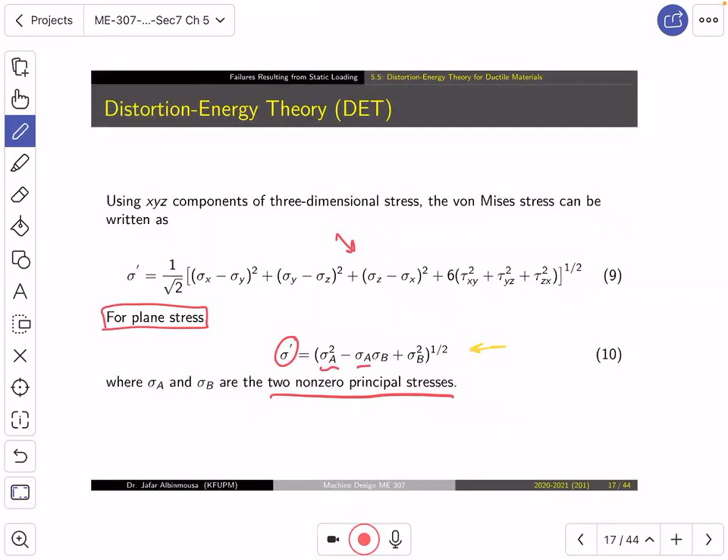Yes, we can. Okay, so we said about the distortion energy theory is that we call it the von Mises equivalent stress as well. And for a plane stress, for example, it is sigma prime. For a plane stress, this is the form of sigma prime. You can also solve it using principal stresses for plane stress, or for general state of stress, which is this one. Now, again, similar to the maximum shear stress theory, we are going to introduce a factor of safety, N.

And N equals the yield stress of the material divided by the von Mises stress. Okay, so imagine this. Always imagine that the yield stress on top should be the maximum value. The one below it should be less than that in order to get a factor of safety greater than 1. Sy doesn't change because it's a property of the material, unless you change the material. So you will see the state of stress and put it below. If that state of stress is so big, it will divide Sy by a big number, and that's when n goes to a value which is less than 1, which becomes not safe.

Okay. Now, the distortion energy theory, if you try to predict the shear yield stress using it, it will become 0.577 the yield in tension. If you remember, the maximum shear stress theory tells you, go and find Sy from tension and then divide it by 2, and that's how you can find the yield in shear. So this one is 0.5 multiplied by Sy. Is that correct? This is Sys from the maximum shear stress theory.

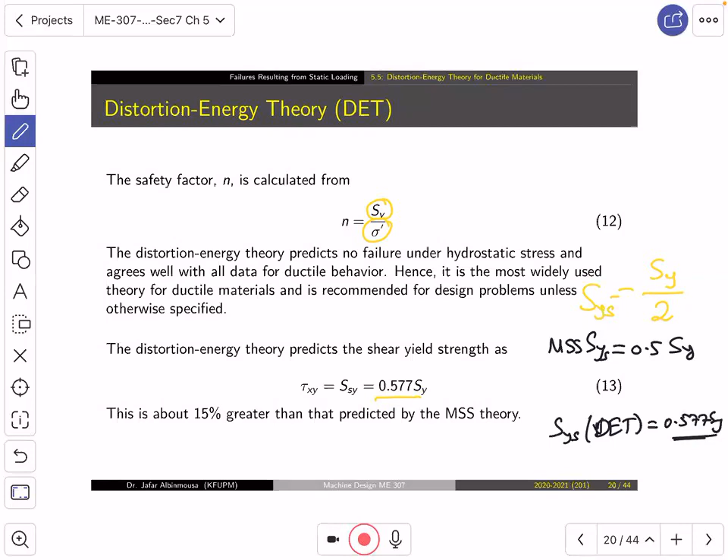Now, Sys from von Mises theory, or the distortion energy theorem, is equal to 0.577 Sy. So it's a little bit off, by 0.077. That's 15% greater. Okay. So I know you may now think, okay, how can we use these theories? We're gonna have a comprehensive example in a minute. So let me show you the next theory.

Next theory is the Coulomb-Mohr theory. This theory was introduced because there are materials which behave in an asymmetric fashion. What does that mean? It means that their yield in tension is different than their yield in compression.

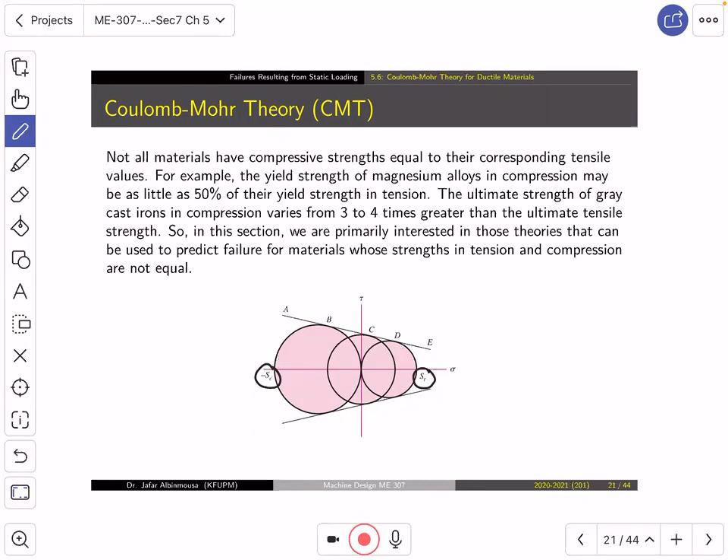You got my point? And what happened? Well, some materials are stronger in compression, some materials are weaker in compression, and vice versa. We don't know. So what happened is this. The Coulomb-Mohr theory, or sometimes called the internal friction theory, states the following. It says go and find the principal stresses. So you need to find them.

You can't use sigma x, sigma y. Only distortion energy theory allows you to do that. And then if the first principal is in tension, of course, here, ya shabab, we're gonna have the 3 cases: when all of the Mohr circle is in tension, all of the Mohr circle in compression, or the Mohr circle is in between. But the theory in general says that if sigma 1 is the positive principal stress, then you should divide it by St, which is the yield in tension.

Why are we calling it St, not Sy? Because you can actually use this not only for yielding, also for ultimate. Which means if you, for any reason, want to use the ultimate strength instead of the yield strength, you can do that. And another thing is that when we use St, we tell you they are in this condition when the yield in tension is different than the yield in compression. Okay, and then you divide the third principal by the compressive yield or the compressive ultimate. So you take sigma 1 over St minus sigma 3 over Sc, which equals 1.

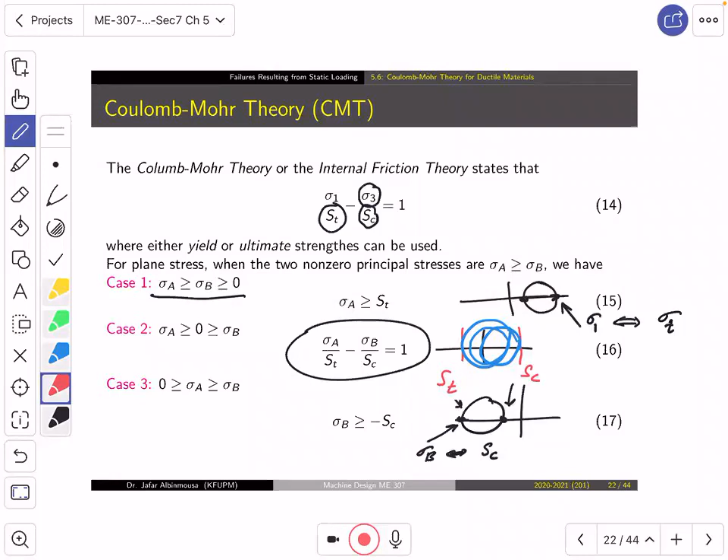Okay? So, interestingly, ya shabab, if you plot this equation, assuming that the material has bigger compression strength in magnitude than tension, then what happened? You will write St here. This is, for example, 100 and 100, and the yield in compression, let's say it is minus 400 and minus 400. Again, like the maximum shear stress theory, we will have two constant lines bounding the boundary, and then we will have two linear lines in between.

Of course, there is no doubt, some materials might have, for example, 300 and 300, and maybe minus 100 and minus 100. That's possible. Okay, so you will have a little square over here and a big one there, and then in between you draw the line.

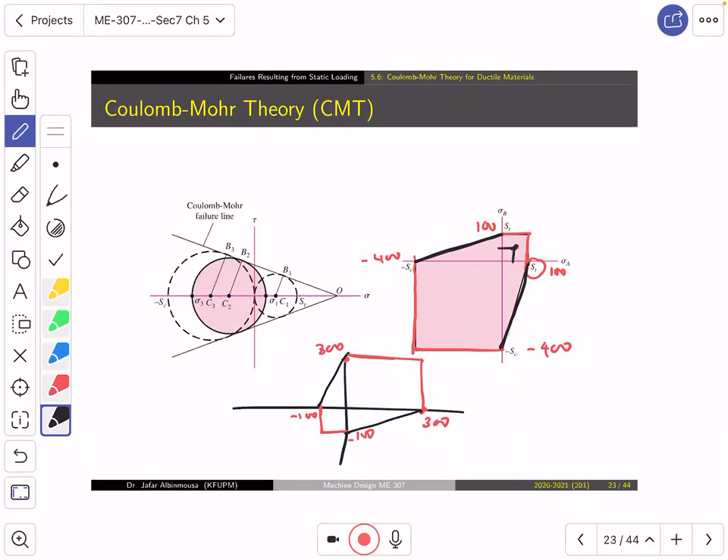Again, if you find sigma 1 and sigma 2 and then sigma 3, and then you determine which is sigma A and which is sigma B, you will go and see, are you within the envelope? Or, for any reason, if this is out like this, you are outside. Then if you are outside, you are not safe. This is a graphical way to tell whether you are safe or not.

You understand, ya akhwan? Now, if we want to write this theory as a design function, which is the most important equation, it's going to be sigma 1 over ST minus sigma 3 over SC equals 1 over N, where N is the factor of safety. If you want to find the shear yield for this material, which behaves differently in tension than in compression, it is the yield in tension multiplied by the yield in compression divided by their sum. That's the prediction of the yield stress for the Coulomb-Mohr theory.

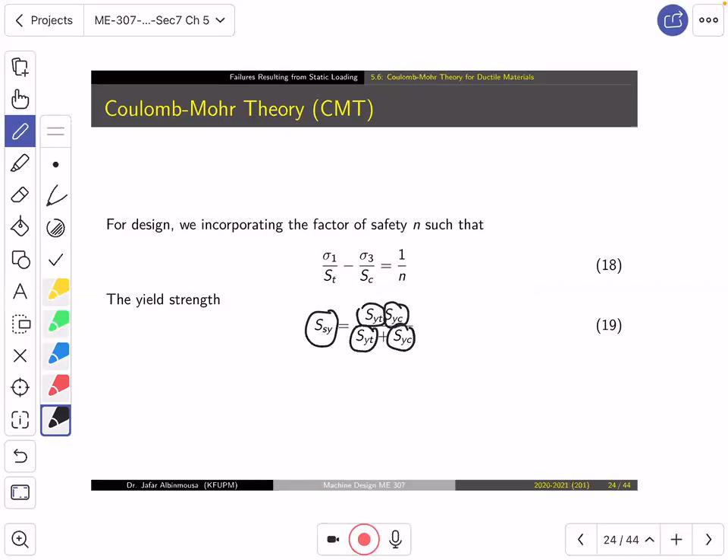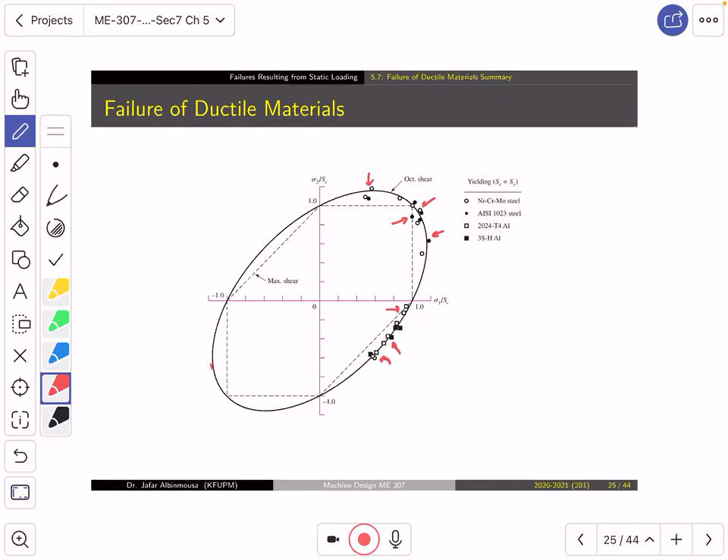Now, I remember I showed you this before. This is a comparison of the von Mises theory and the maximum shear stress theory, and those little dots around are experimental values. Sometimes you can see that some values are close to the maximum shear stress theory, and of course there are also many values that seem to approach the von Mises theory.

Now, let's go over this in like 3 minutes, okay? And then we'll have the next 2 minutes just to get ready, because in 5 minutes the quiz will start.

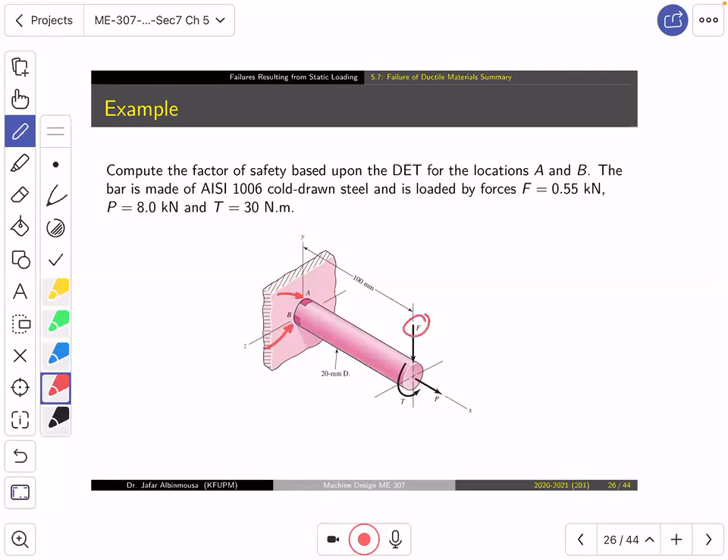So what do we want? We want to compute the factor of safety based on the distortion energy theory for location A and B. As you see, this is A and this is B. The bar is made of AISI 1006 cold drawn steel, and it is loaded with a force 0.55 kilonewton. Then we have a P force, which is 8 kilonewton, and a torque which is 30 Newton meter.

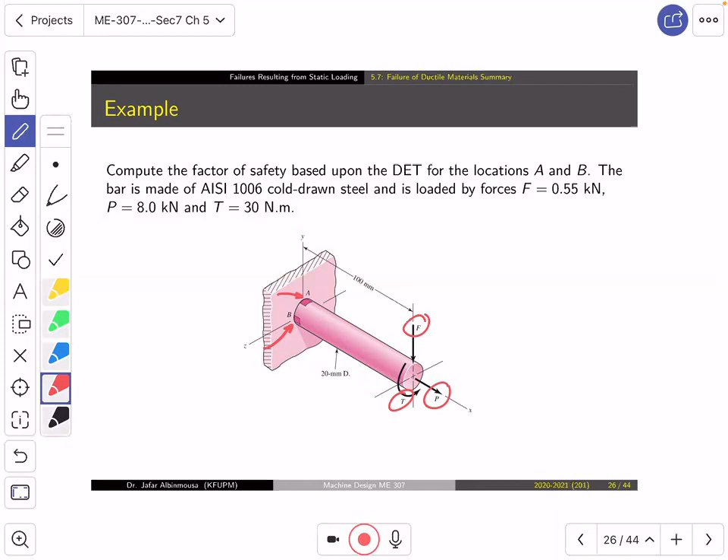Now, what I want you to understand is the question, what does it say? It says you want to find the factor of safety for point A and B. If I look at the cross-section over here, this is point A and this is point B. And I want to find NB and NA, the factor of safety.

Now, this question by itself teaches you one thing, that there is ultimately an infinite number of factors of safety. There is a factor of safety for this point, for this, for this, everywhere. Why? Because it's a stress field and it is changing everywhere in the cross-section. I can compute the value of the stresses for each point, and for each point I compare it with the yield and I get the factor of safety. That's how it would work.

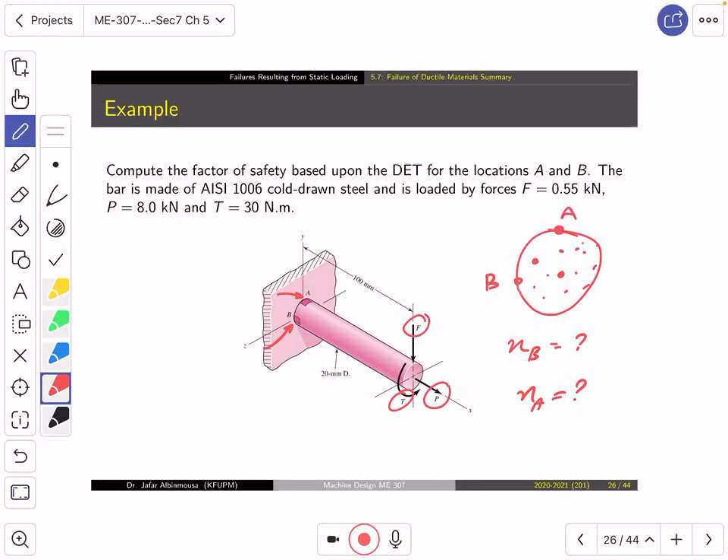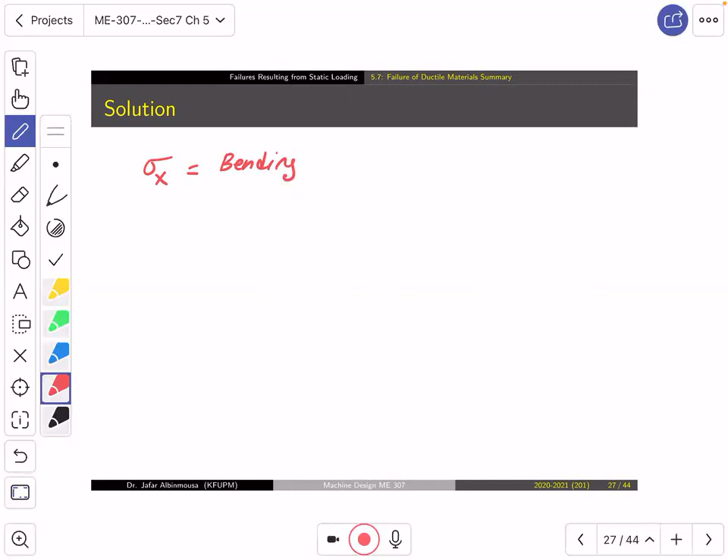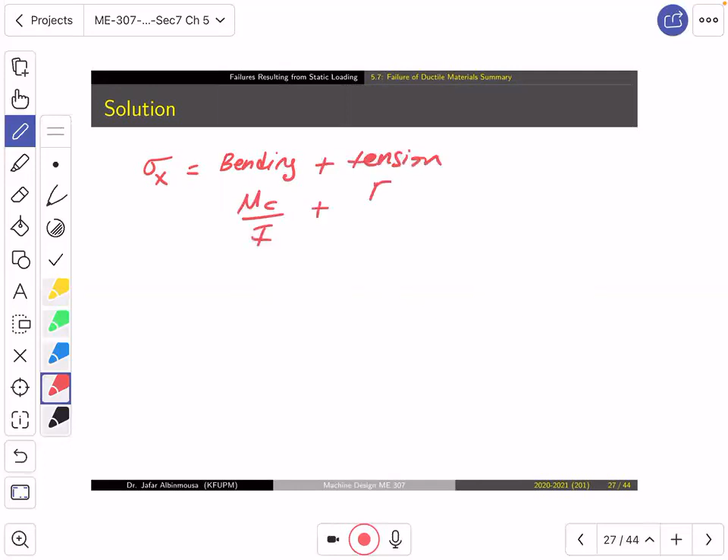So let me, in summary, give you what happened over here. We will have sigma x coming from the bending and from the tension. What is the bending equation? MC over I. What is the tension? It is F over A. As you remember, we have a cross-section which is subjected to a load P. So this is actually going to be P, and the area is this.

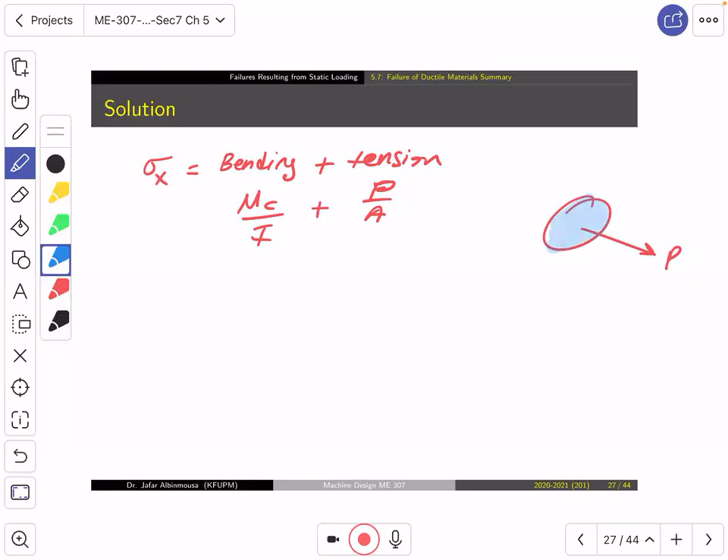This area. Now, I also have a force like this, which is going to cause bending, that will introduce tension in the top and compression in the bottom. Of course, in the middle there will be the neutral axis, so point B will not have any bending. Now, we will pick, for example, point A and analyze it. We'll have tension and bending. And point A will also have torque, which is TR over J.

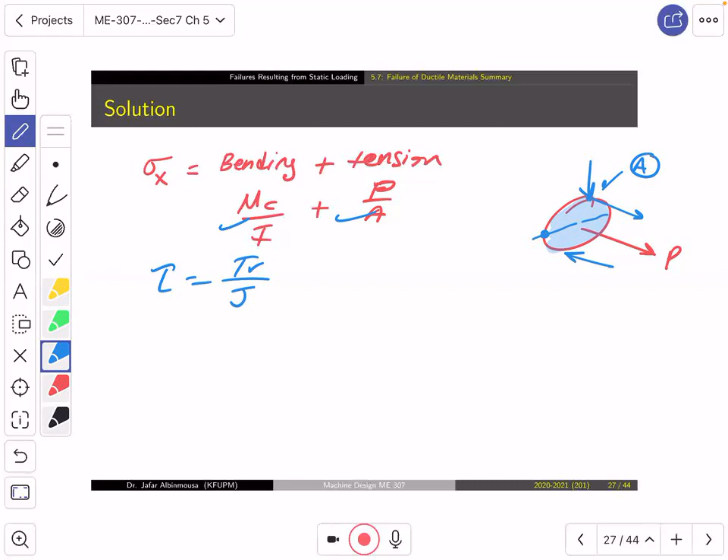After that, I can draw the element. Point A, ya shabab, is located on the top like this. When I look at point A, I will see that there is sigma X on it and there is shear. That's it. Once I have sigma X and shear, I plug them into sigma prime equals the square root of sigma X squared plus 3 tau XY squared, and I find sigma prime. Then N equals SY over sigma prime. I repeat the same thing for point B.

I think it's time, ya shabab, for the quiz.